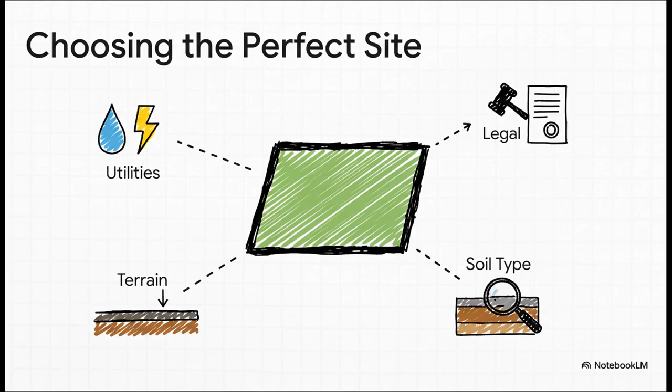Is there easy access to water, to electricity? Is the ground level enough so you don't get flooded? And maybe the most important question of all, can the soil actually hold up the massive weight of the building? And of course, you got to do all this while following local laws.

Okay, the site is chosen. Now comes the really precise part, mapping every single inch of it. This is where surveying comes in. And this is a field that has gone from really tough manual work to, well, kind of sci-fi, using satellites and lasers. Just look at this. This perfectly shows the massive leap in technology we've made.

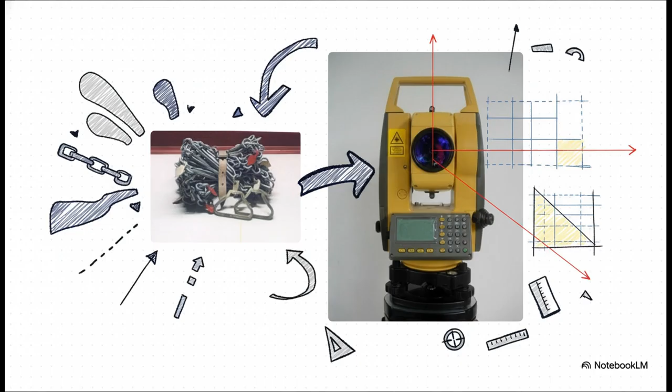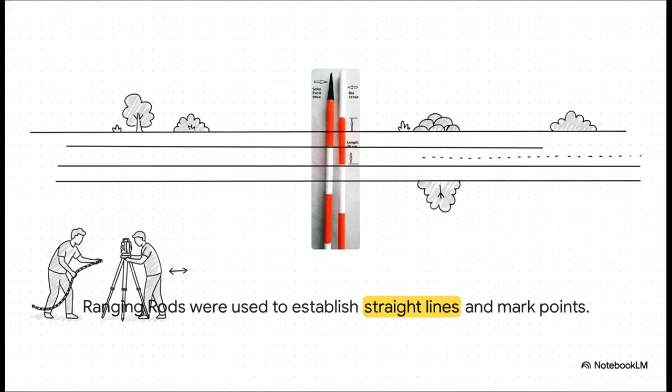On the one side, you've got the old school surveyor's chain, a literal chain of metal links they use to measure things out. And on the other, a modern total station, this laser blasting device that measures things with insane accuracy. Can you imagine? Back in the day, if you had to measure a long distance, surveyors had to physically walk the entire line, using these things called ranging rods to make sure they were going straight. Think about doing that through a dense forest or up a steep hill. It was slow, back-breaking work.

Fast forward to today, and it's a completely different world. A total station can bounce a laser off a target and get a measurement that's accurate down to the millimeter. GPS uses satellites to tell you exactly where you are on Earth. And then there's remote sensing, which uses things like drones to gather data from the sky, which just changes the game entirely.

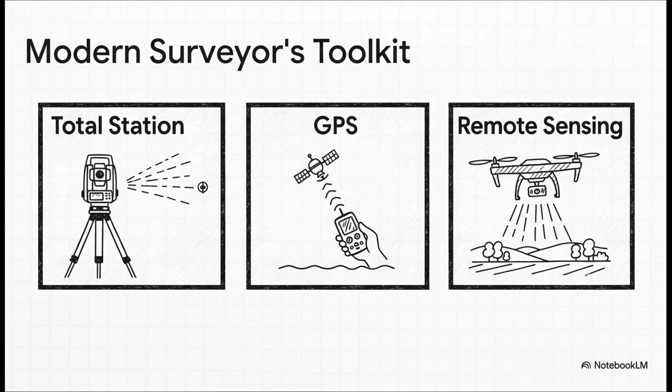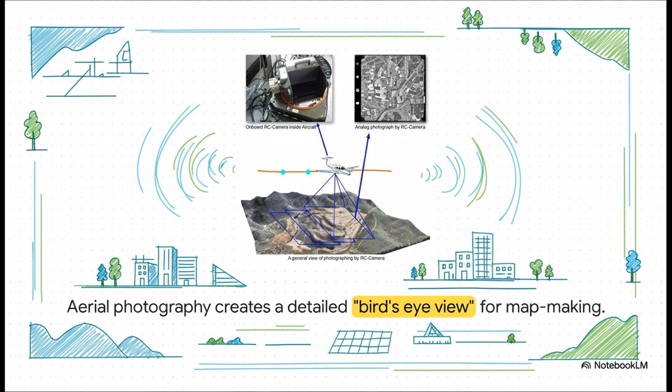And this is where it gets really cool. Remote sensing gives us this incredible bird's-eye view. By flying over an area with special cameras, you can create these unbelievably detailed maps. It's faster, it's way more accurate, and you can do it without ever having to chop down a single tree.

All right, the land is mapped, every point is plotted. Now the real fun begins, the actual construction. And it all starts from the ground up, with the single most important part of any building, the foundation. But think about it for a second.

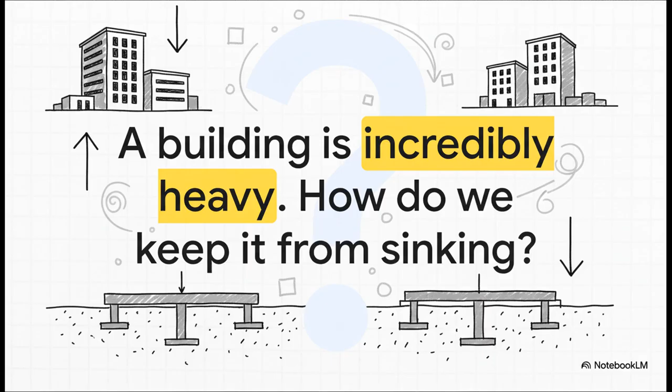A building is mind-bogglingly heavy. All that concrete and steel. So how do you stop it from just sinking into the ground? How do you transfer all that weight safely into the earth? Well, the answer is the foundation. And it's not a one-size-fits-all solution.

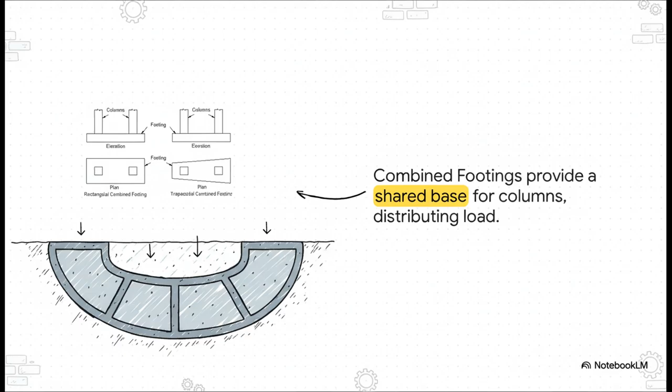For instance, you might use what's called a combined footing, like you see here. It creates a shared base for a couple of columns, which spreads their weight out over a much bigger area. But what happens if you're building on really weak, mushy soil? That's when engineers pull out something called a raft foundation. Just think of it like one giant concrete slab that the entire building sits on. It basically lets the whole structure float on top of the weak ground without sinking or tipping over.

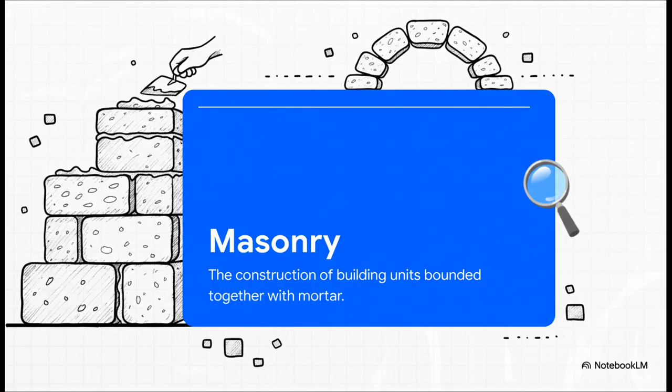Foundation is solid. We're anchored to the earth. Time to go up. And that means we're talking about masonry. This is the ancient art of stacking things like stone or brick and sticking them together with mortar to make walls. And when it comes to materials, it's all about trade-offs.

You've got stone versus brick. Stone is super strong and keeps water out, but it's also really heavy and a pain to work with. Bricks, on the other hand, are lighter, way easier to handle, and they're great against fire. It really just depends on what the building needs.

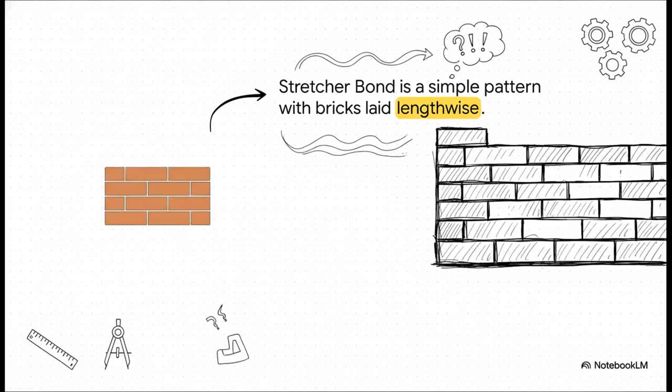But here's something you might not think about. It's not just what you use, it's how you stack it. The pattern, which is called a bond, is super important for how strong a wall is. This is the most basic one, a stretcher bond. All the bricks are just laid long ways. Simple, and it works great for internal walls that aren't holding up a ton of weight.

Now for the really heavy-duty walls, you need something stronger. Enter the English bond. Here, you alternate a row of long bricks with a row of short bricks. This interlocking pattern makes the wall incredibly strong and fantastic at spreading out all the weight from above.

Okay, the walls are up. It's actually starting to look like a building now. So what's next? Well, we need to add the internal skeleton, the parts that hold up the floors and the roof, and then put on the final skin to turn it into a place you can actually use.

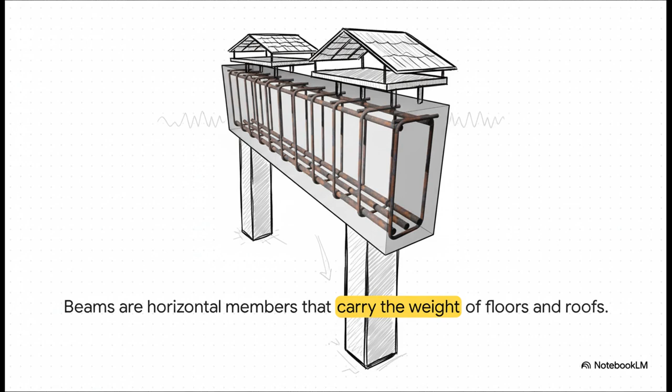Let's talk about beams. These things are the unsung heroes, the workhorses of the whole structure. They're these horizontal supports that stretch across open spaces, and their whole job is to take all the weight from the floors and the roof and channel it safely down into the columns.

So what are those beams holding up? Slabs. These flat concrete surfaces, usually with steel inside for strength, are literally the floors you're walking on and the ceiling over your head. They're what turn a skeleton into a multi-level building.

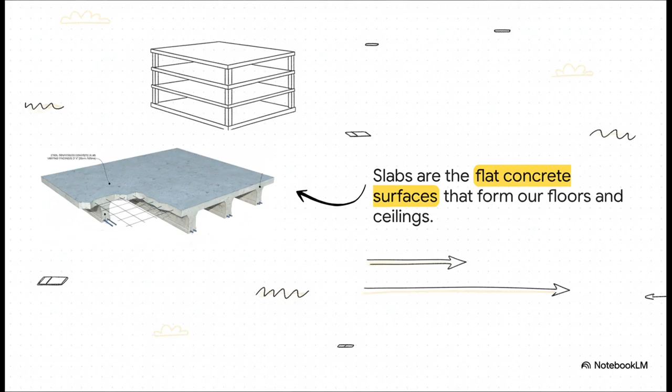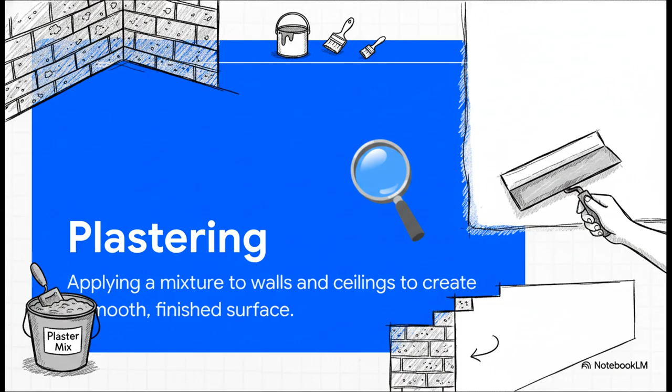But we're not done yet. All those brick walls, they're still rough, uneven, not exactly move-in ready. To protect them and get them ready for paint, they need a final coating, and that's where plastering comes in. And this is a real craft. It's not just smearing some stuff on the wall. It's a careful, multi-layer process.

You start by prepping the surface. Then you put on a rough base coat so the other layers can stick. Then comes a second, smoother coat for strength. And finally, you apply a super thin finish coat and polish it until it's perfectly smooth.

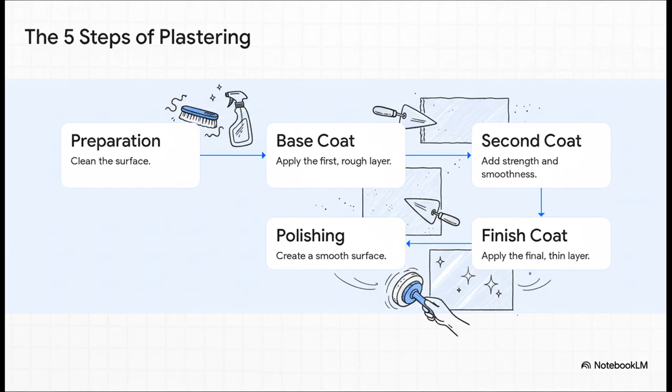So there you have it. From a simple idea on a blueprint to a solid structure we can live and work in. It's an amazing story of science, skill, and a whole lot of hard work. The next time you walk into any building, maybe you'll see it a little differently. You'll see the unseen story.